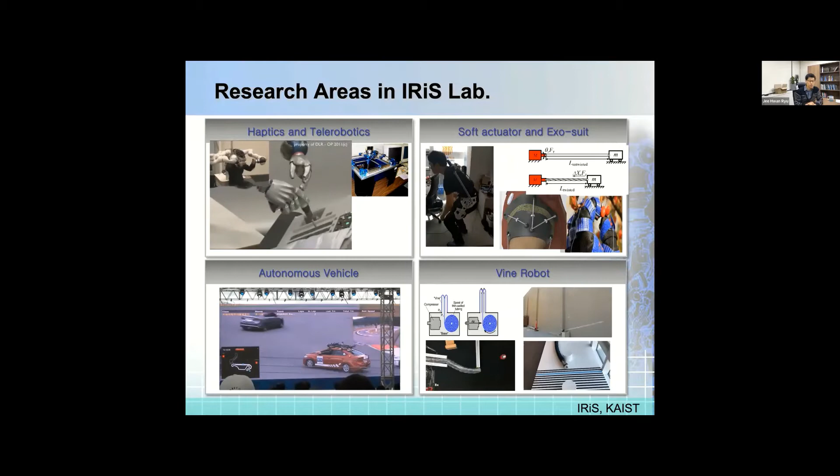So it's like we are doing 4 totally different research topics, but actually our theme is human and robot interactive systems. We are developing interactive robotic technology and interactive robotic control schemes for human-robot interaction. Then let's get back to the main topic.

I've been working on haptic interfaces and haptic systems for many years. What is a haptic interface? I guess all of you already know. A haptic interface is a mechatronic system that allows a human to feel and physically manipulate a virtual or remote environment. In a sense, a haptic interface is closely or physically interacting with a human, so safety is one of the critical factors. Safety is really important.

If you look at haptic interfaces, there are 2 different types: impedance type and admittance type. Not only haptic interfaces, but also all general robotic systems that physically interact with humans can be categorized into these 2 types.

What is impedance type? Impedance type usually measures position and provides a force command, and it's backdrivable and lightweight. So it's good for low impedance display, but limited in displaying high impedance. On the other hand, admittance type haptic interfaces measure force and provide a position command, so they are usually non-backdrivable and heavyweight. This makes them good for high impedance display, but quite limited for low impedance display.

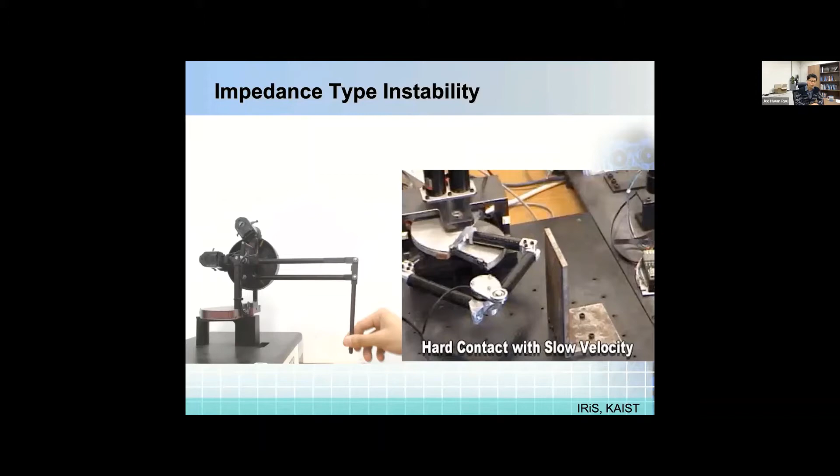That's the kind of unstable behavior and instability. For telerobotic systems as well, if you try to increase the virtual coupling between master and slave — suppose we're using a haptic interface as master and a remote robot as slave — then let's see.

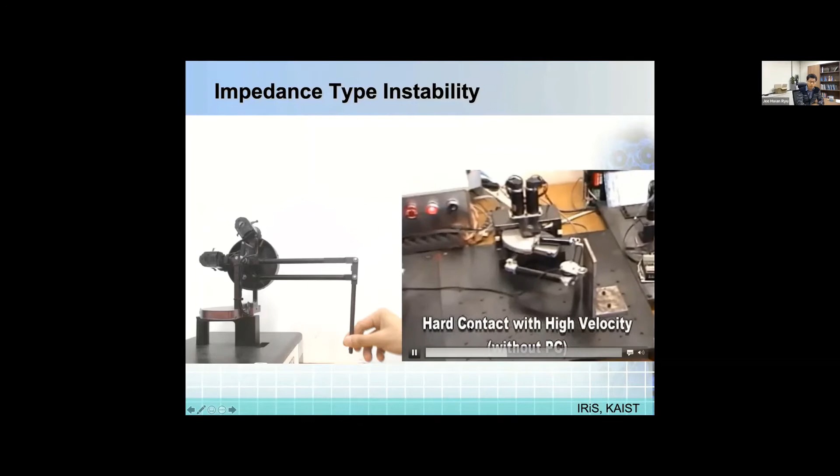Okay, that's enough. So that's a highly unstable behavior. Then how do we stabilize this unstable behavior?

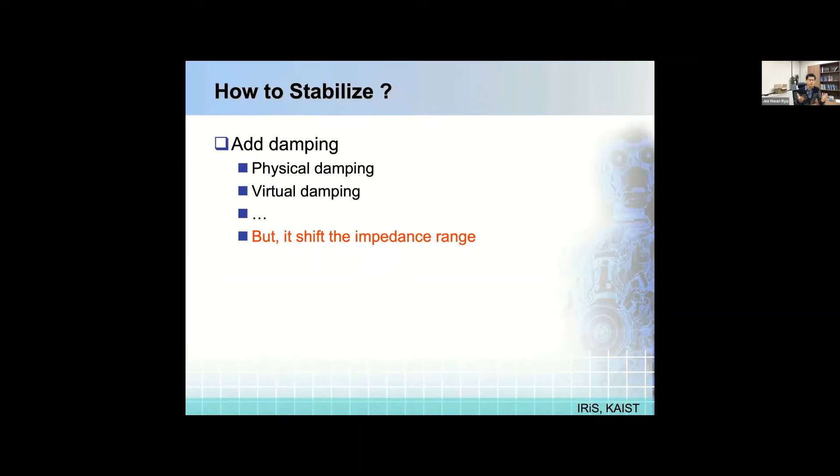Usually people try to add damping, either physical damping or virtual damping, but that actually shifts the impedance range, it doesn't increase it. Also you can limit or adjust the stiffness, basically lowering the controller gain with virtual coupling or energy bounding type methods. But this also compromises the impedance range. So basically we can stabilize the system, but we need to sacrifice and compromise performance.

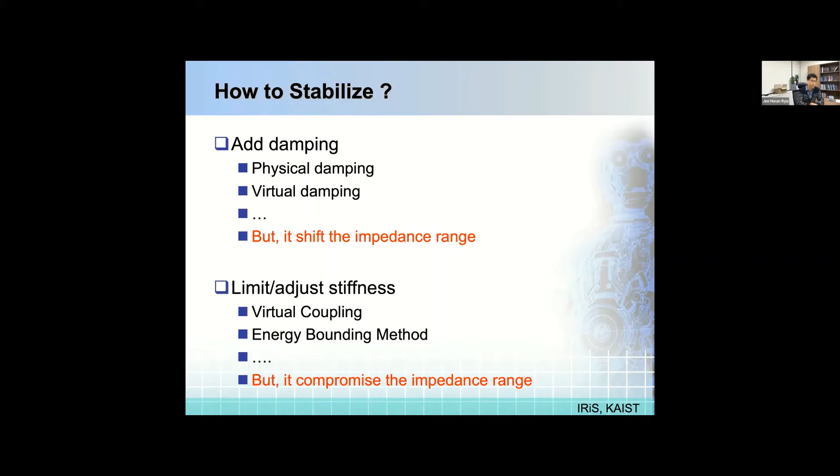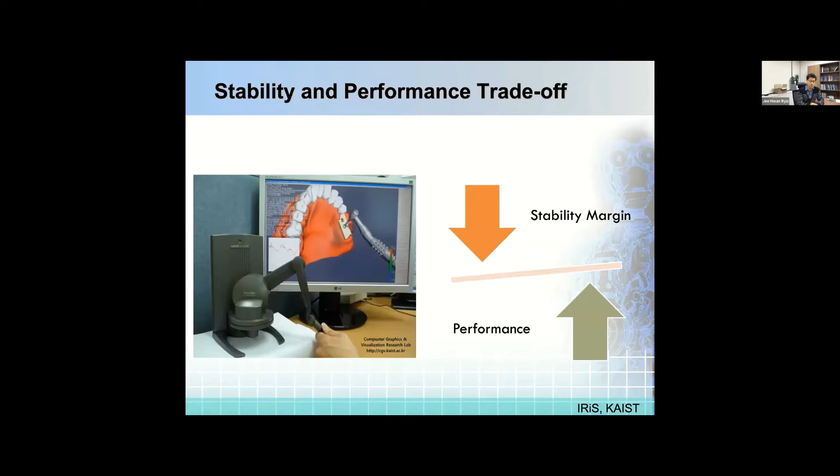So there's always a trade-off between stability and performance in any haptic or robotic manipulator control. If you want to increase the stability margin, you have to sacrifice performance, and if you want to increase performance, you have to sacrifice the stability margin, and vice versa.

About 20 years ago, I proposed the time domain passivity approach, one typical control approach. This control approach is known as one of the least conservative control approaches of its kind, because it minimally modifies the original optimized controller structure or controller gain. So it's known as one of the least conservative control approaches.

It has two components: a passivity observer, which can measure energy flow in real time, and a passivity controller, which is kind of an adaptive energy dissipation element, applied whenever necessary.

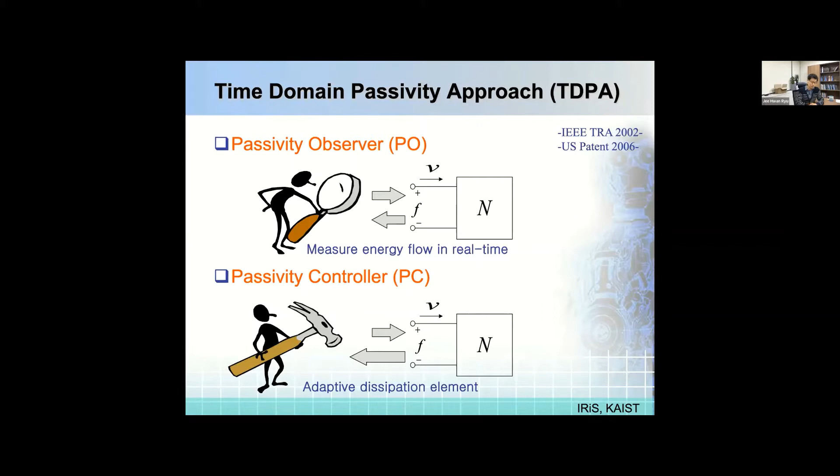Let's talk about what passivity is. Passivity is based on the conservation of energy. As you all know, energy supplied by a network can never exceed the energy which has been fed into it. So this is the mathematical definition of passivity.

Let's say there is a one-port network system, or some physical system, like this key, my car. If you push the system and the resulting velocity is in the same direction as the force, that means you're providing energy to the system. But if you push the system and the resulting velocity is opposite to your force direction, that means the system is giving back energy to you, energy comes out of the system.

So if you integrate this power conjugate pair, force and velocity, over all time, considering initial energy storage, and this value stays positive for all time, that means the system is passive. That's the mathematical definition and physical meaning of passivity.

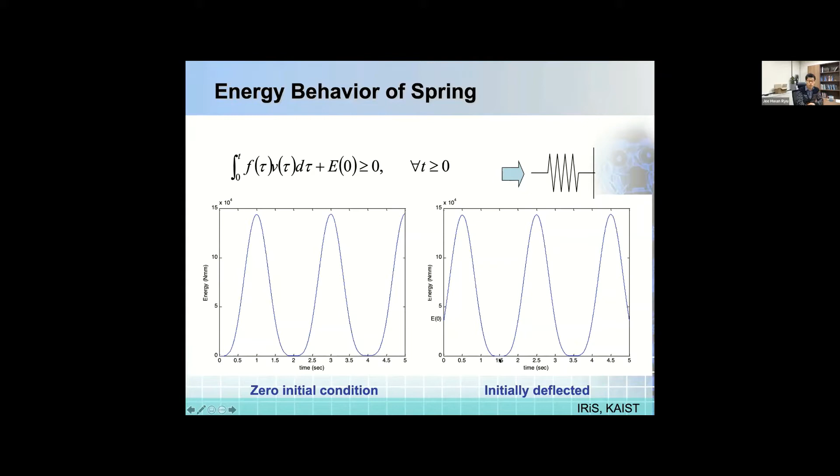Let's take a simple example with a spring. If you press the spring, you give energy to it and energy accumulates inside the spring. At some point you let it go, and the spring gives energy back to you, but never more than what you gave to it, so the spring is passive. But if the spring is initially deformed, then you start to press it, energy comes into the system from that point. At some point, if you let it go, energy comes out of the system, and it can be more than what you just gave in that instant, but the spring is still passive overall because the total energy never goes below zero. That's the mathematical and physical meaning of passivity.

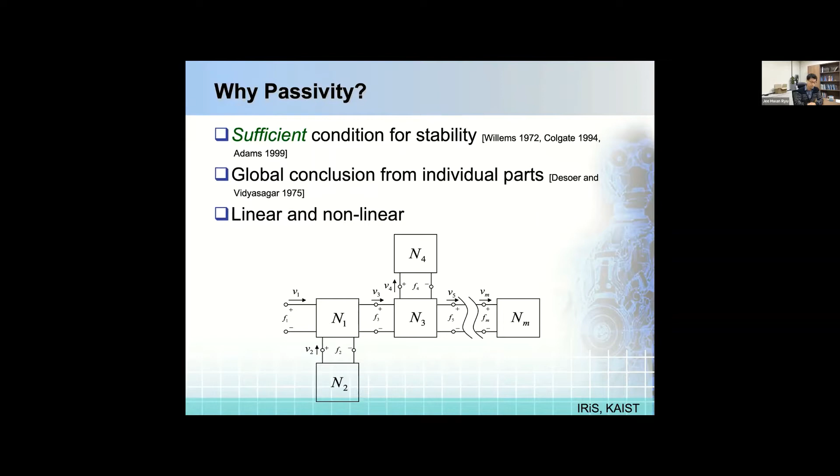So why do we care about passivity? Because passivity has a very fascinating property: it's a sufficient condition for stability. We don't need to prove stability directly anymore, and we can draw a global conclusion from individual parts. So if individual parts are passive, then the overall system is passive. This means you can individually passivate the system. We can also handle nonlinear systems simply by considering input and output signals. It's a very fascinating property. Passivity has many fascinating properties.

So we propose the passivity observer and passivity controller. The passivity observer is an energy monitoring component. As I mentioned, there's a mathematical definition of passivity, but it's quite challenging and difficult to satisfy this mathematical condition in real time because it's very simple but nonlinear. What other people did was convert this into the frequency domain, design a controller there, and convert it back to the time domain, which ends up having a fixed controller gain considering the worst case.

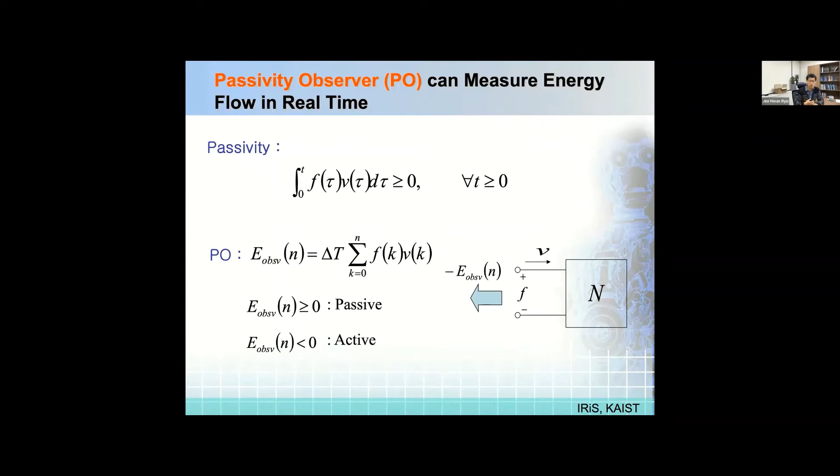But what I proposed is extremely simple, maybe too simple actually. What if we integrate this in real time based on the monitored signal? If this value stays positive all the time, then the system is passive, and we don't need to worry about passivity. But at some point, if this value goes below zero, the system is active. The good thing is, since we are monitoring this in real time, every sampling time, we know exactly how much energy is produced in real time from the system.

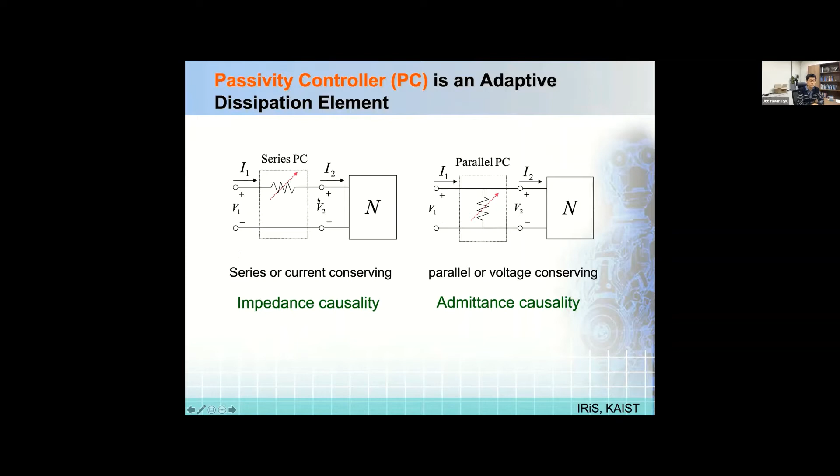Since we know how much energy is produced in real time, we can apply an adaptive damping or dissipation element, depending on causality. For impedance causality, we can use a series type passivity controller, and for admittance type causality, a parallel type passivity controller, which basically means modifying force based on velocity, or modifying velocity based on force.

And the beauty of the passivity controller is that it can very easily be implemented into existing control architecture. By adding several lines of C code, you can implement a passivity controller. This is the main core part of it, only 3 or 4 lines of C code is enough.

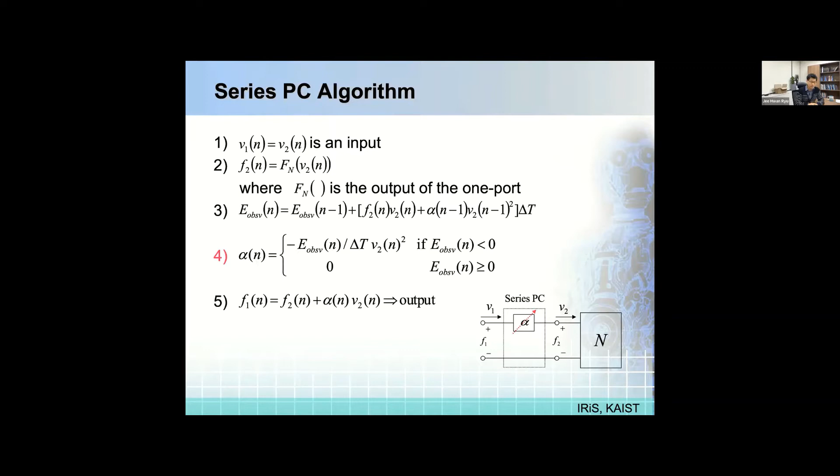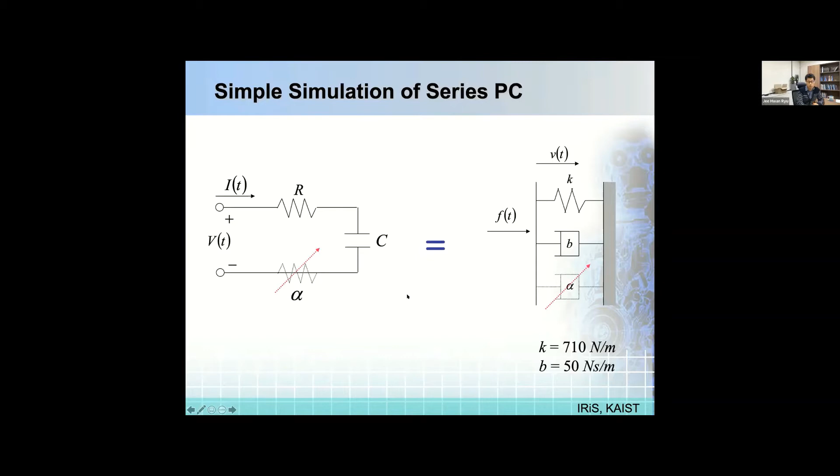Let's take a simple example with a virtual wall with spring and damper. There is a virtual spring and damper in parallel with the virtual wall, which is equivalent to a resistor-capacitor serially connected electric circuit. The physical meaning of the passivity controller is an adaptive resistor or adaptive damper, which appears and adaptively changes whenever necessary.

So I push and release with this velocity profile of the virtual wall. Much energy first comes into the virtual wall, and a little less amount of energy comes out of it. That difference is actually dissipated by the damping of the virtual wall.

But when I intentionally change the virtual damping to a negative value, which is not physically feasible, but I just want to make the system intentionally active, then a bigger amount of energy comes out of the system than I gave. So it's basically active, become active.

And I turn on the passivity controller to dissipate this. When this energy is about to cross the zero line, the passivity controller adaptively dissipates all the produced energy in real time. So if you look from outside the system, it just looks passive.

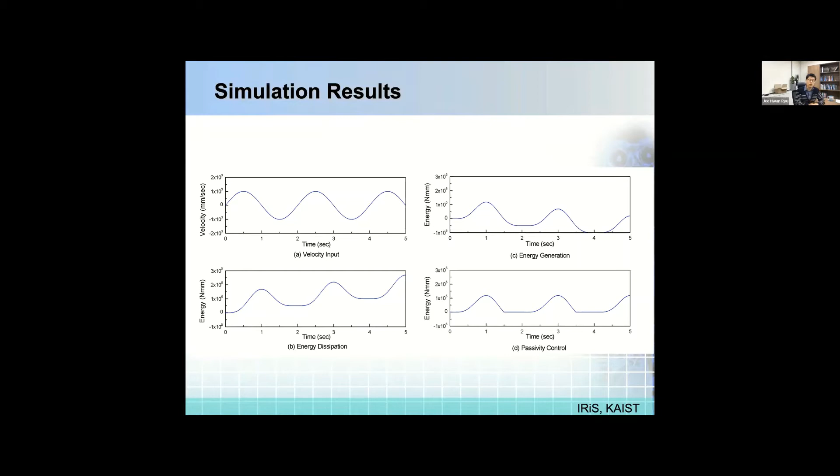That's very simple. The passivity controller was first implemented on the Excalibur haptics interface at University of Washington when I was a postdoc there. This haptic interface can display 200 Newton force maximum on each axis, and it is interacting with a virtual Lego airplane.

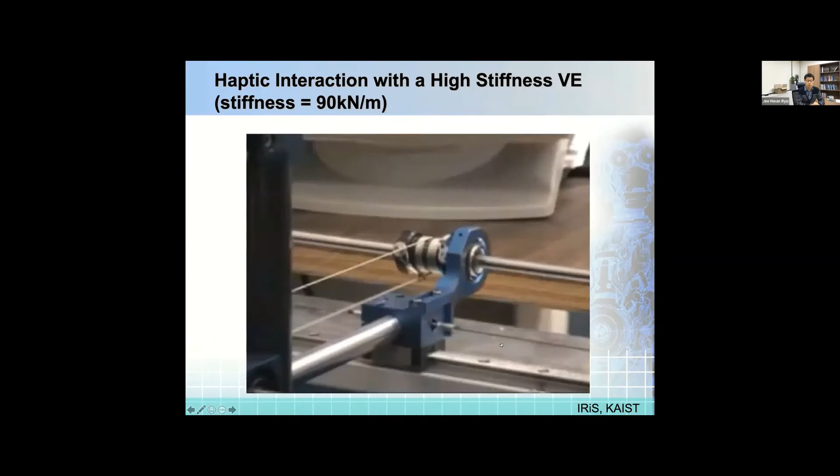The issue was, what was the maximum allowable stiffness that we could display? One of the former PhD students there, Rick Adams, proposed the virtual coupling idea to stabilize haptic interaction. The maximum stiffness that virtual coupling could stabilize was 70 kilonewtons per meter. But I increased this value to 90 kilonewtons per meter, which is very high, extremely high.

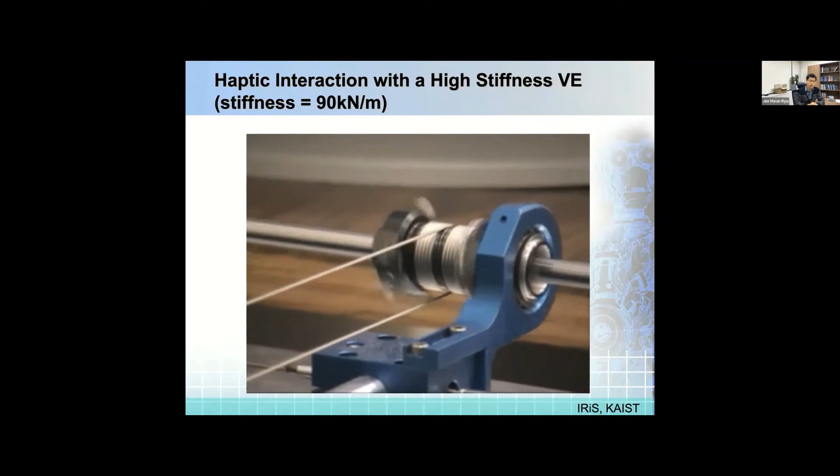As you can see, this contact was quite unstable. But after I turned on and implemented the passivity controller, we were able to achieve stable interaction and stable contact while maintaining the same high virtual stiffness, 90 kilonewtons per meter. That was the first implementation.

And I extended this idea to the multi-port case, in order to implement a similar idea for telerobotic systems and other control systems. The issue was, for the single-port case it was straightforward, but for the multi-port case, where to put the passivity controller, how to monitor energy, what type of passivity controller to use, how to activate this - those are all questions. I won't explain this in detail, but you can see the paper.

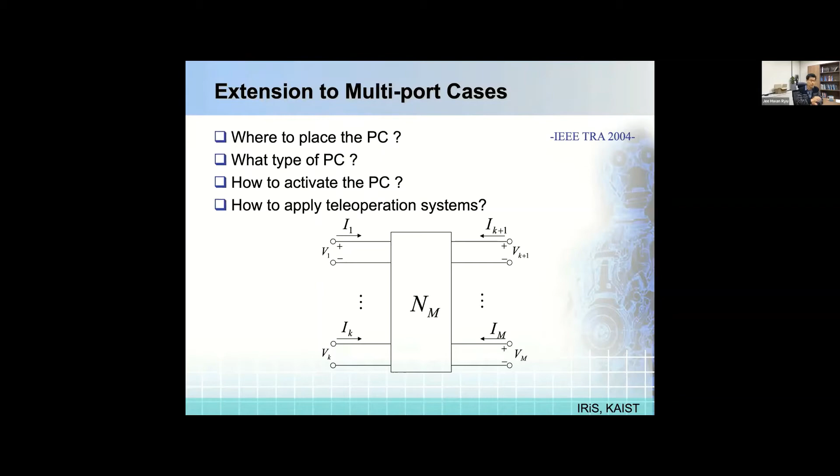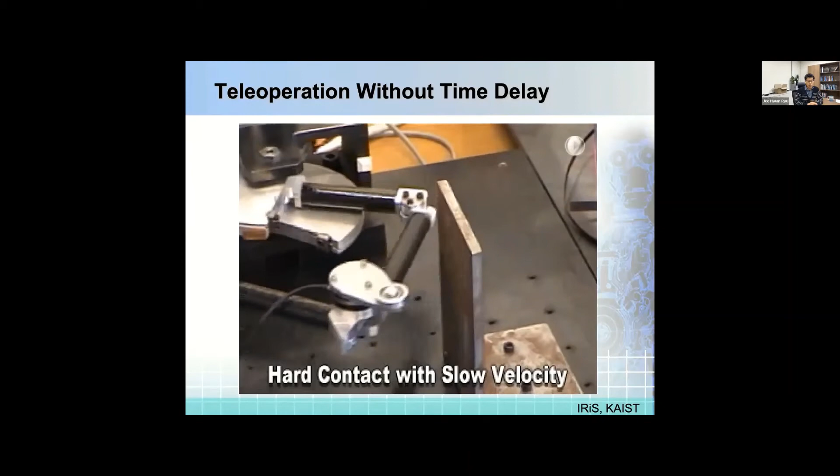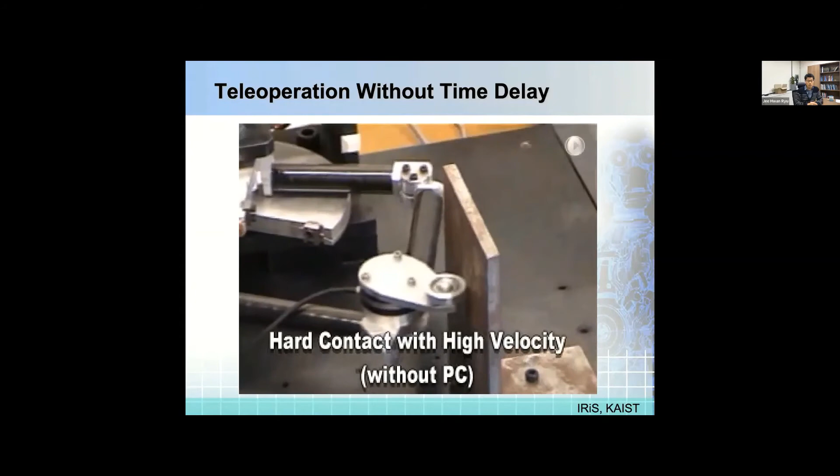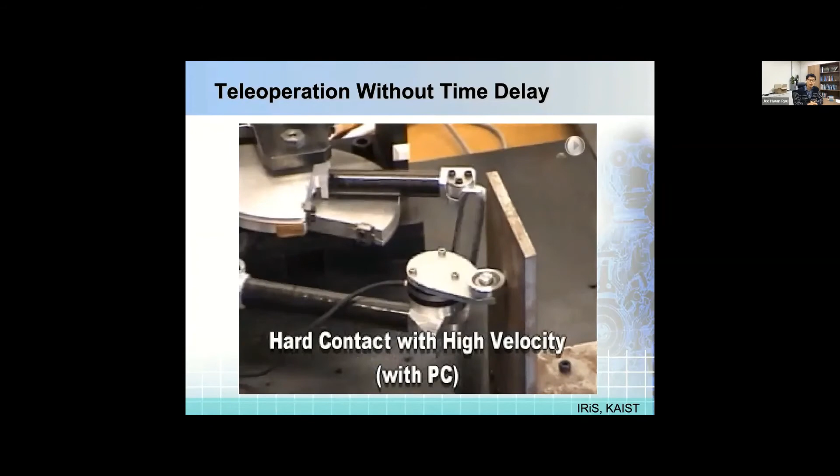I developed a master-slave telerobotic system, two-DOF with a force and torque sensor at the tip. As you can see, if I approach at slow velocity, there was no stability issue. But if I made contact with normal or high enough velocity, the system suddenly goes unstable. With the passivity controller, we were able to make stable contact and stable interaction.

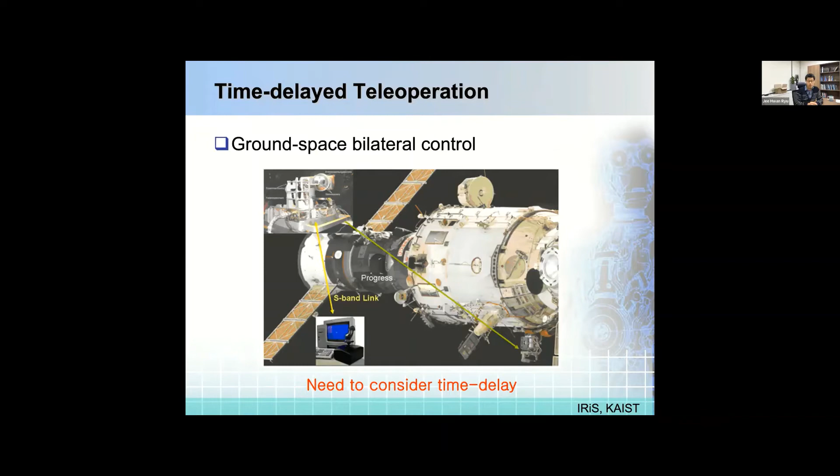After that, I was invited to the German Aerospace Research Center, DLR, because they wanted to implement this control algorithm in their ground-space bilateral teleoperation system. In order to implement this idea, we needed to consider time delay - that was a critical issue.

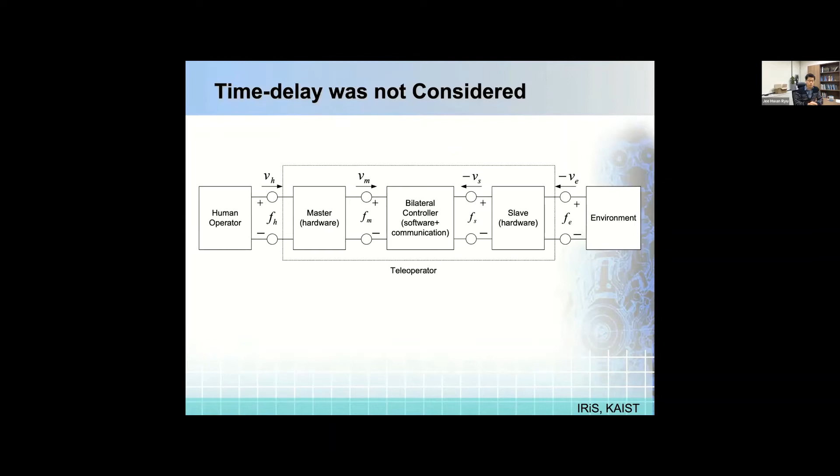If you look at the control architecture of the telerobotic system I implemented in the previous video clip, this is a teleoperator and telerobotic system. If I magnify the teleoperator part only, there is a master, a slave, and a bilateral controller. What I did was extremely simple.

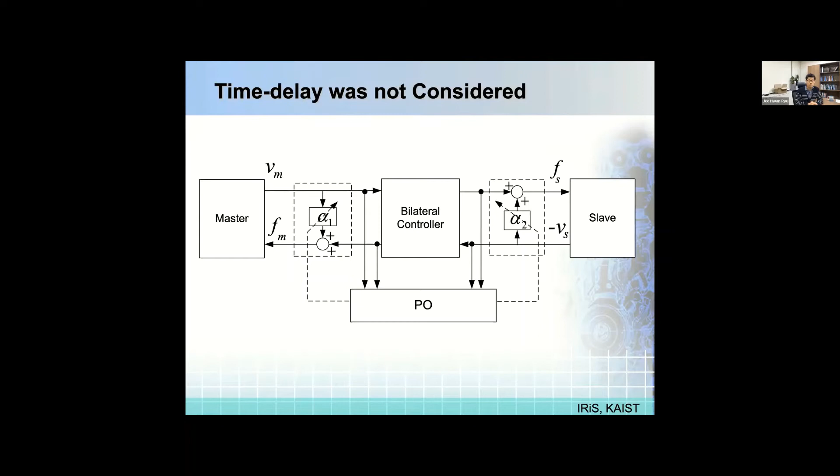I just took the power conjugate pair from both sides of the bilateral controller, integrated this, and estimated energy. Whenever there is output energy, which possibly makes the system active and unstable, I put adaptive damping to dissipate this in real time. That's basically the architecture.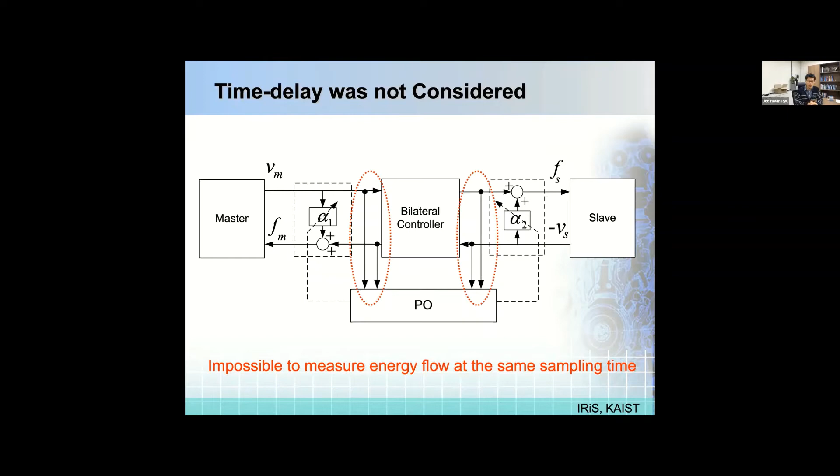But when there is time delay, it was impossible to measure energy flow at the same sampling time because there was time delay between master and slave. So it was very difficult. Together with DLR researcher Jordi Artigas, we extended the time domain passivity idea considering time delay.

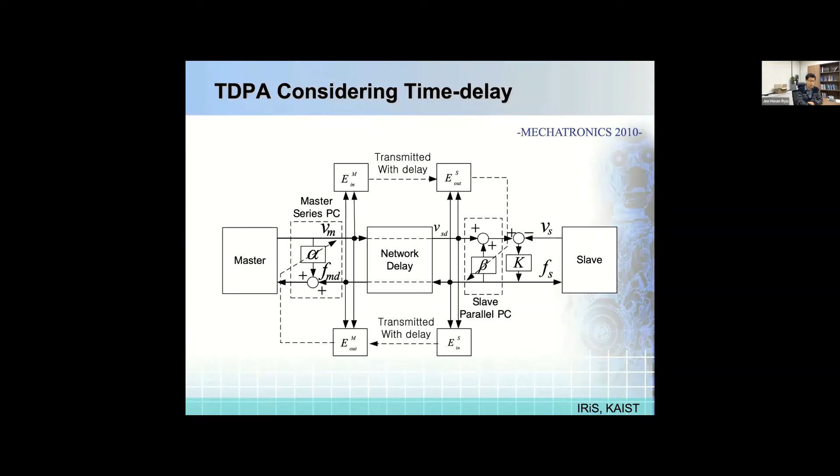The idea is also very simple. By looking at the power conjugate pair, we can separate input and output energy. By monitoring input energy on one side and output energy on the other side, and sending the input energy value to the output side, we compare output energy and input energy. When the output energy is about to be greater than the input energy, we put adaptive damping and dissipate this. That's the basic idea.

That idea has been implemented in phantom teleoperation in our lab. This is not my voluntary motion - I was not able to actually make stable contact. It became crazy, even with just 100 millisecond time delay.

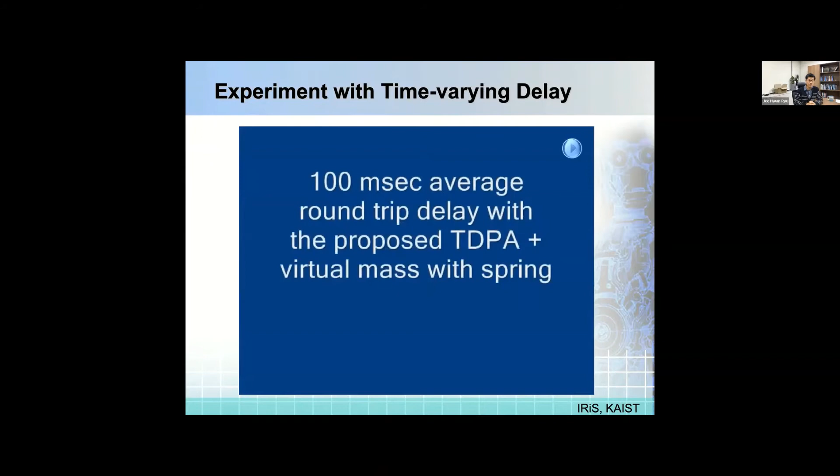But after TDPA was implemented, as you can see, the contact was stable, and I was able to manage stable contact, and get big enough force feedback from the slave side. And the magnitude of time delay was actually not a problem. So based on this control architecture, we were able to manage over 2 seconds of even communication blackout.

Okay, since the video clip is quite long, I will skip this.

And why is this approach better than other control approaches? There is another control approach, like wave variable control, to overcome communication time delay. But when we compared time domain passivity control architecture with wave variable control architecture, the time domain passivity control architecture minimally modifies the original force measured from the slave side. If you compare this to wave variable, the wave variable approach may smooth out the original control force a lot.

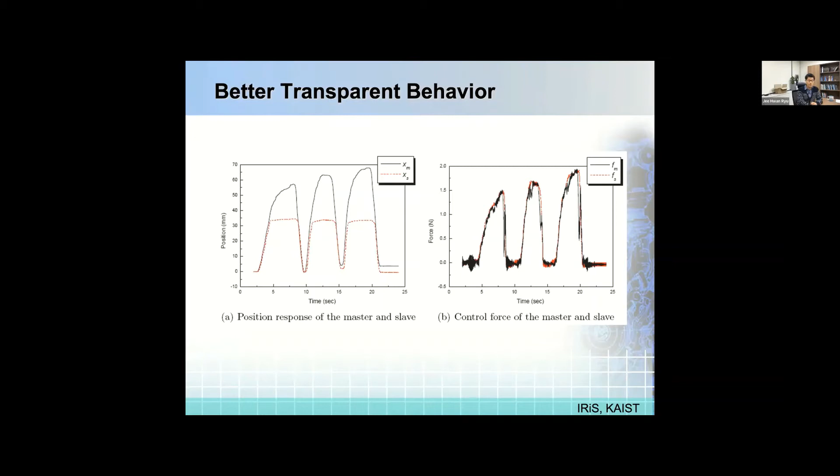Okay, so in that sense, TDPA shows better transparency. And I transferred this control idea to DLR, and they implemented this idea in their Space Justin telerobotic system, as you can see here.

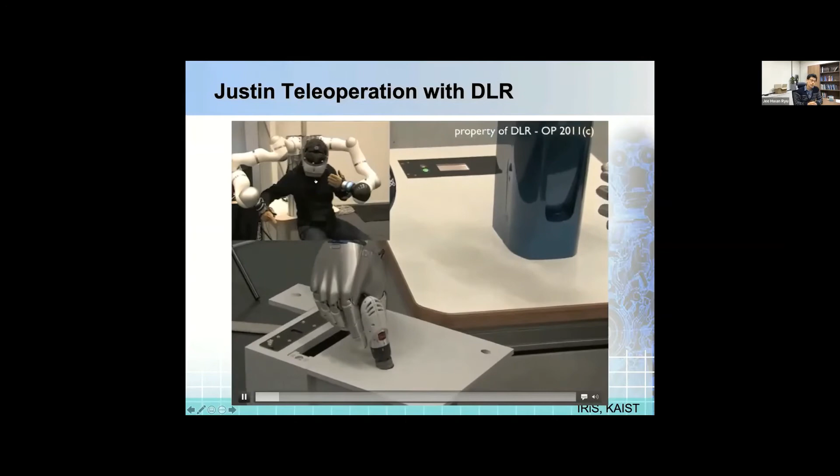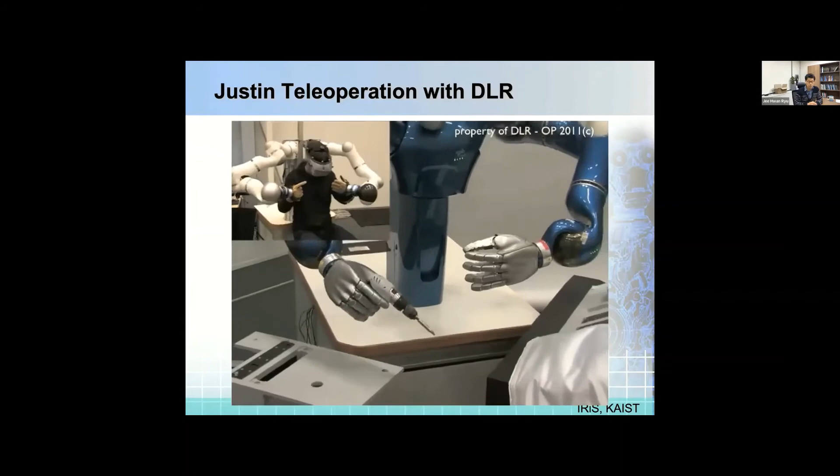So the guy controlling this is Jordi Artigas, who is my collaborator. By implementing and extending this idea to a multi-degree-of-freedom redundant manipulator, he was able to see what robots see, and he was able to feel what robots feel. So he can basically do most of the tasks that an astronaut in the International Space Station needs to do.

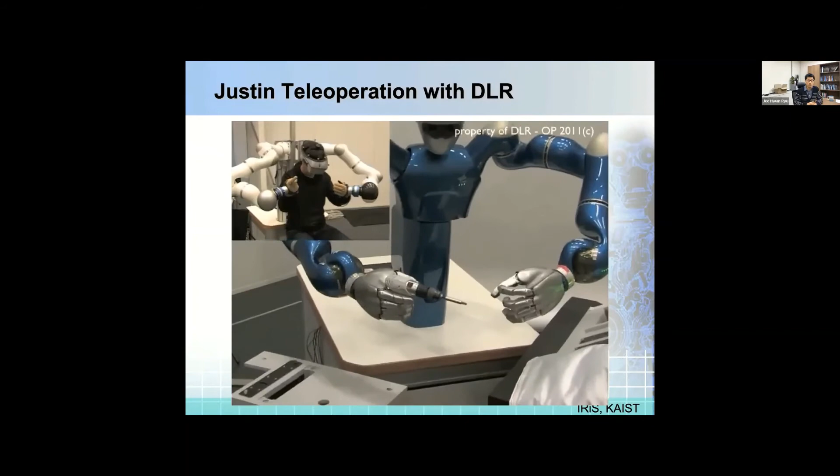This robot system actually communicates through satellite, and there is a 500 millisecond time delay. I will skip this also, fast. So you can do drilling jobs, switch operations, and so on and so forth.

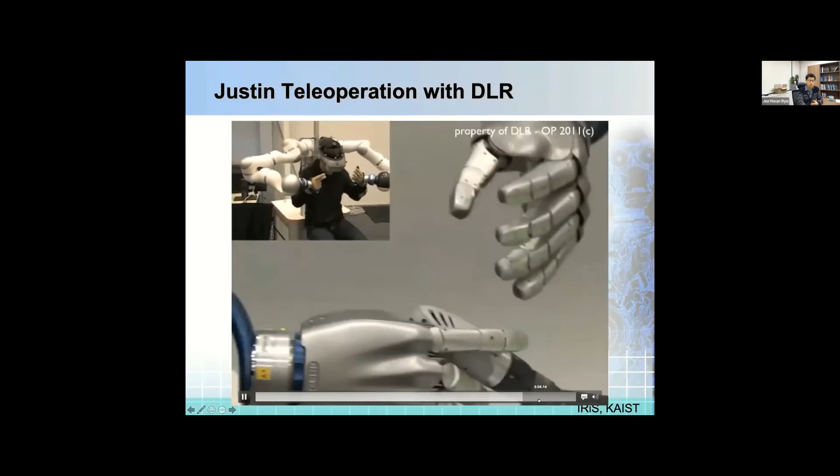And recently, we actually did the opposite teleoperation. So an astronaut in the International Space Station controlled the Justin robot on the ground to demonstrate handshaking. In one exhibition, they demonstrated handshaking performance with one of the politicians in Germany. And we got great feedback from the astronaut. He said the feeling was great and quite transparent.

Not only for haptic and telerobotic systems, we extended this idea to explicit force control. There are two types of force control methods in general: indirect force control, which does not use a force sensor, and direct force control, which uses a force sensor. In direct force control, there are also two types: with inner loop position control and without inner loop position control.

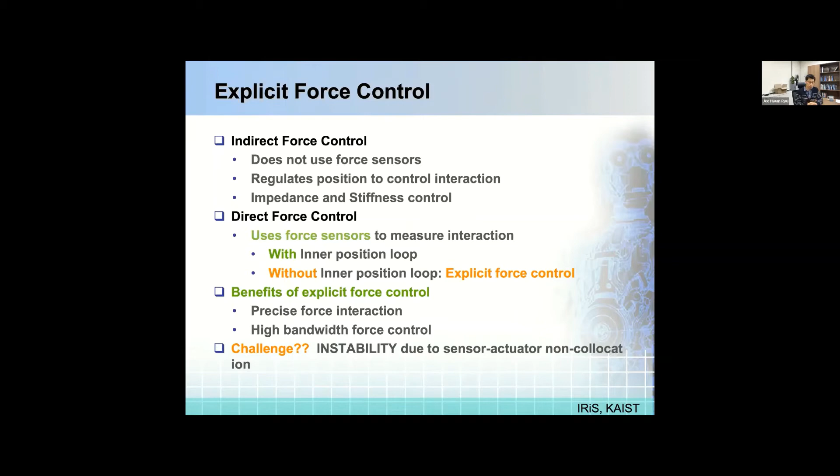We call direct force control without inner loop position control explicit force control. The benefit of explicit force control is that it provides precise force interaction and high bandwidth force control. So it's quite an interesting control architecture, but quite challenging to stabilize due to the sensor and actuator non-collocation problem. Together with researcher students at Stanford and DLR, we extended this TDPA, time domain passivity control idea, to explicit force control of the KUKA robot.

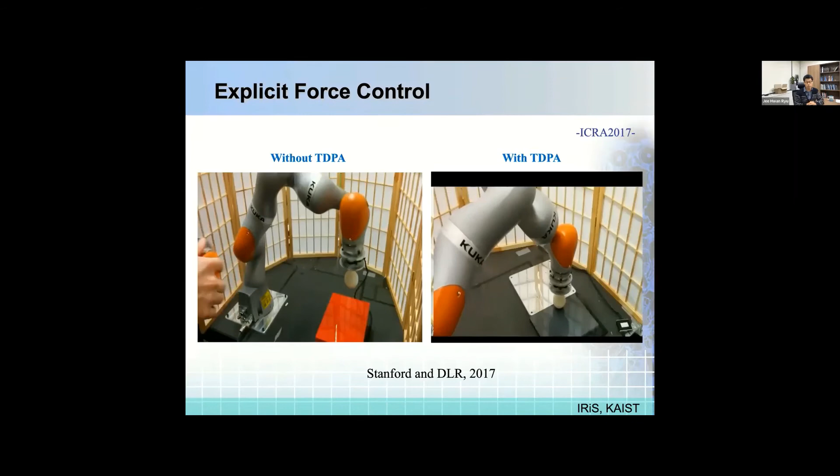As you can see on the left, without TDPA, with a simple disturbance, it easily goes unstable. And when the surface stiffness suddenly changes, the robot cannot maintain explicit force control. With TDPA, we were able to manage stable force control, and even sudden surface stiffness changes don't destabilize the system.

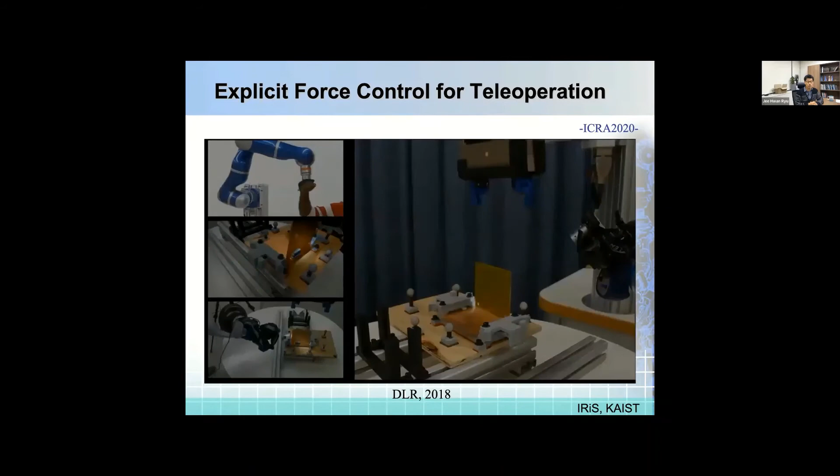We also extended this idea to teleoperation, including explicit force control architecture. Due to the high precision force control and high precision position control performance, we were able to conduct a chip insertion task with communication time delay through teleoperation, even with sub-millimeter tolerance. That shows quite a possibility and feasibility of teleoperation for dexterous manipulation.

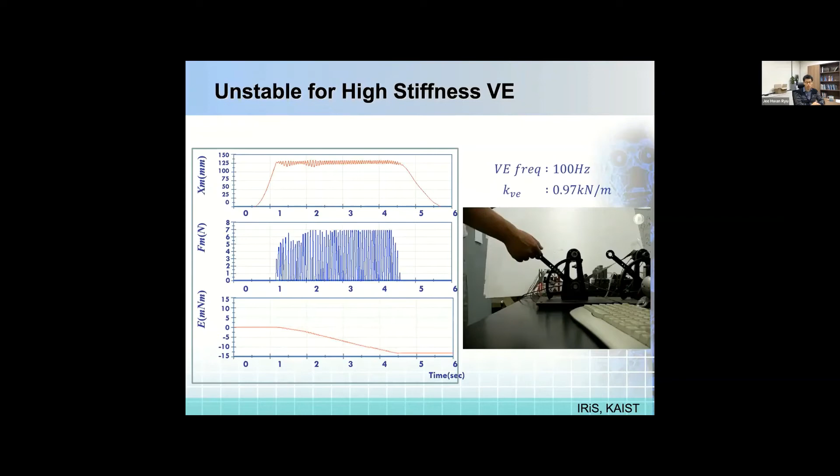All right, so time domain passivity control approach shows good performance in haptic teleoperation and even explicit force control, but there is certainly a limitation. With such a lightweight, small haptic device, 100 Hertz low sampling rate, and 1 kilonewton per meter is already high enough to destabilize the interaction.

Time domain passivity approach can stabilize this up to twice as stiff, but as you can see, there is some red line, noise-like behavior. Due to the on-off nature of the time domain passivity control approach, if we increase the stiffness to a certain level, then time domain passivity cannot stabilize this anymore.

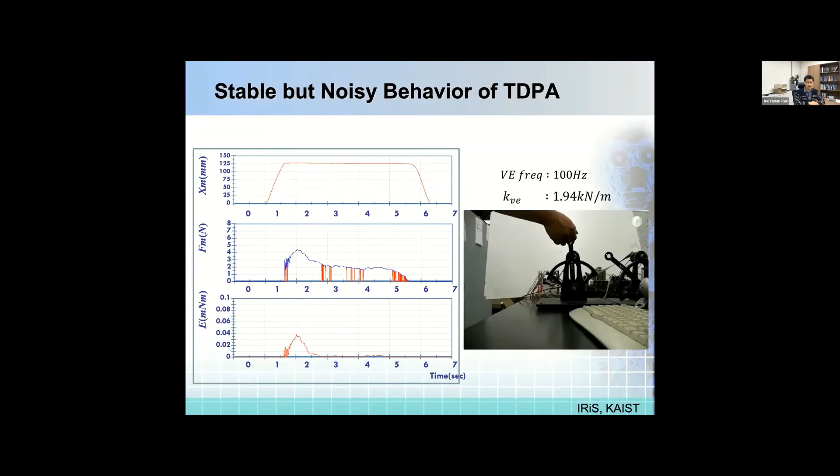So we started to analyze what the main, real reason for the unstable behavior is. Let's say this is the virtual environment, and this is the haptic interaction point. So you press in.

If you look at the position-force graph, this is the input pressing path, and the area below this pressing path is the input energy you give to the system. When you release, it follows the blue staircase line, and the area below this releasing path is the output energy from the system. So whatever small P gain you use, there is always bigger output energy than input energy. So the system is always active.

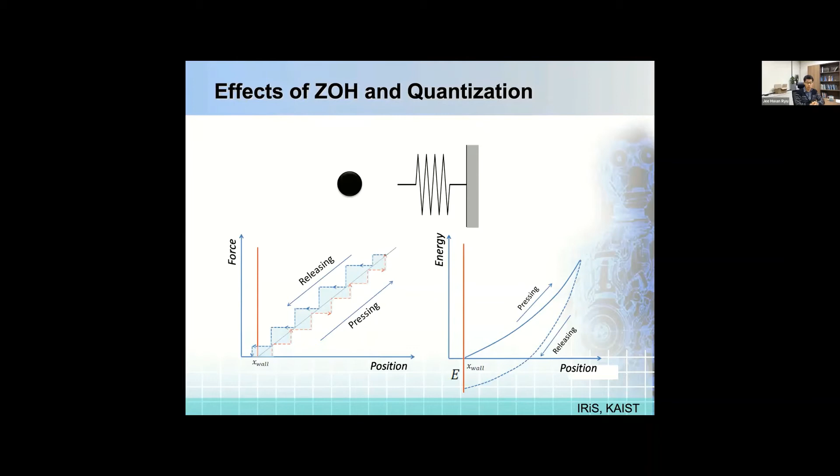Then how come the system doesn't diverge? Because passivity is simply a sufficient condition, so that much amount of energy produced from the system can be dissipated by the intrinsic system damping. Then the system is still stable. But if you increase the stiffness and controller gain, the amount of energy increases, so the system cannot handle this anymore, and it goes unstable. What we proposed is really simple.

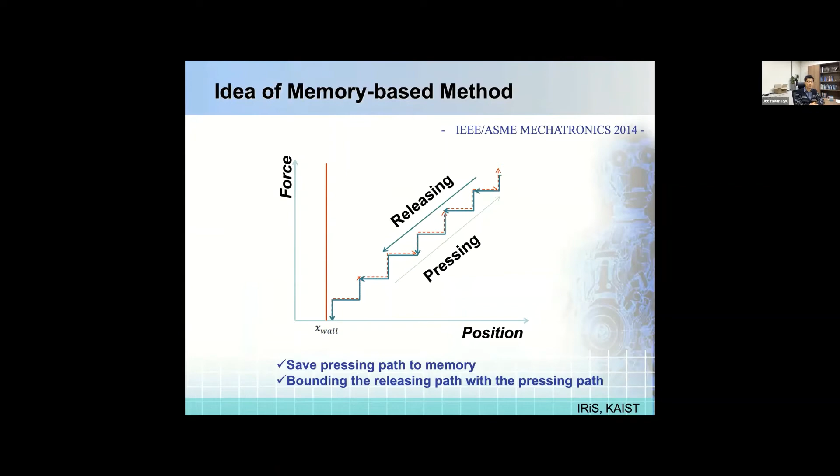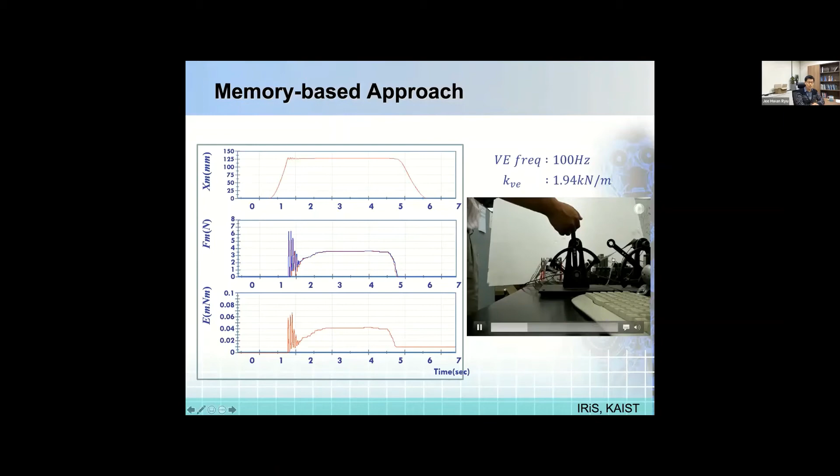We save the pressing path to memory, and when we release, we bound the releasing path with the pressing path. That way, we can make the system exactly passive, no more active energy output. By applying this, we were able to stabilize the interaction, and you can see there is almost no noise behavior, very smooth.

You may wonder how to extend this idea to the multi-DOF case, but we have done this. So without the memory-based approach, it's unstable. With the memory-based approach, it was quite stable, and we were able to feel high stiffness interaction.

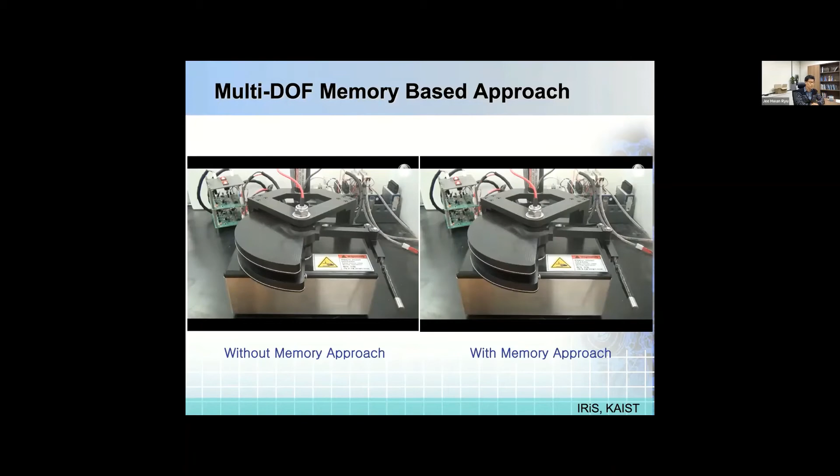But if we want to implement the memory-based approach, we need special hardware, which is not actually special nowadays. We need an FPGA as a motor driver. But there are many people who don't want to modify their hardware, but still want to increase their stiffness. So for them, we propose another control architecture, the successive force augment approach.

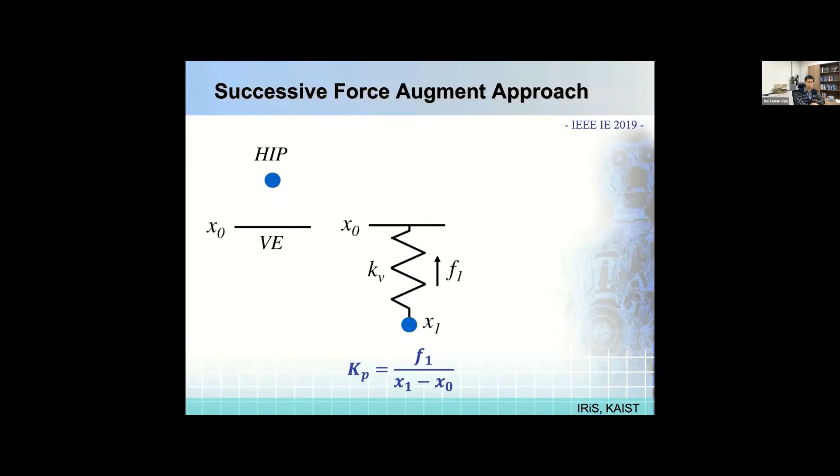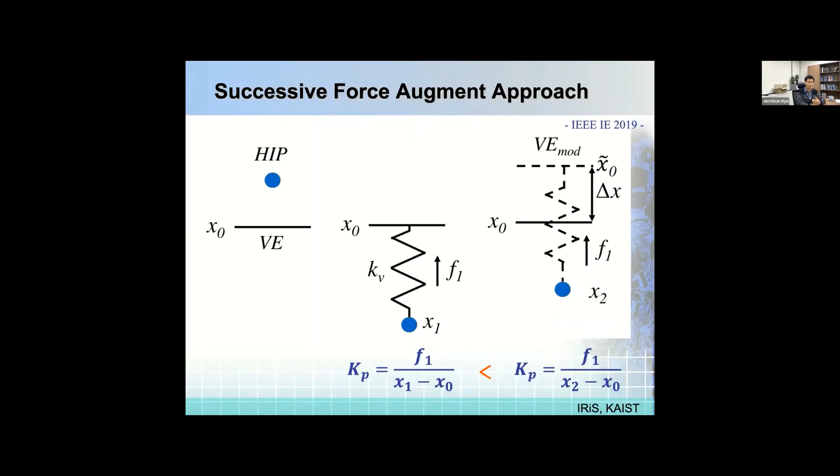Let's say there's a haptic interaction point and a virtual environment here. If you penetrate in, this is the perceived stiffness that you feel, force divided by penetration depth. But while the haptic interaction point is inside the virtual wall, you suddenly shift up the initial virtual wall position. Then the perceived stiffness suddenly increases, greater than the original stiffness. This looks like a trick, but it actually works when you implement this to haptic interaction, which is basically the same as introducing a state-independent feed-forward force.

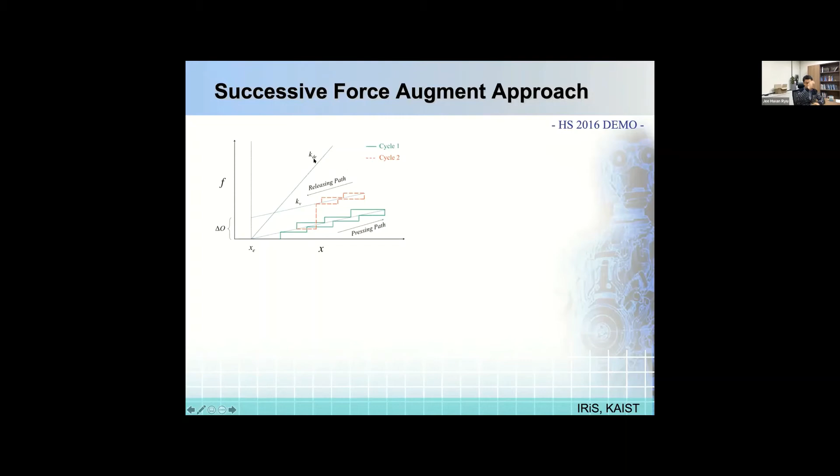So one penetration in and out introduces a force offset, and you jump to the next higher level stiffness, and in and out, jump to next, in and out, jump to next, and eventually you reach the higher stiffness, high force value. That idea has been implemented to the Phantom, and we were able to achieve 5 to 7 kilonewtons per meter for wall stiffness, which is extremely high for Phantom.

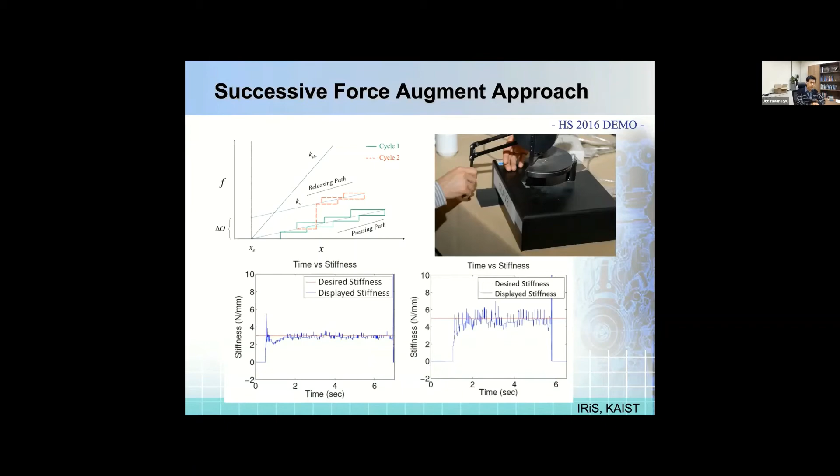There is another idea, similar but a little different. For the pressing path, we took low stiffness, low enough to stabilize, and the releasing path is even lower than this. So it ends up still inside the virtual wall, in the middle of somewhere. It just looks like introducing an offset. After that, we took another pressing path and releasing path, pressing path, releasing path, and eventually you reach the desired force and stiffness profile while maintaining low stiffness, while maintaining stable interaction. So that's kind of a trick, but it actually works quite well.

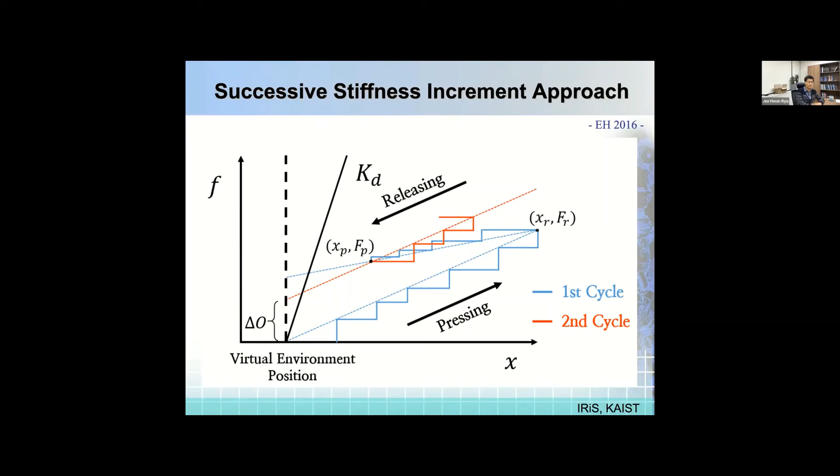We have implemented this idea not only in the haptic interface but also in series elastic actuator control. The series elastic actuator is actually good for stable interaction, but due to the non-collocated nature of the sensor and actuator, it's quite challenging to increase the controller gain. If you use low controller gain, it's stable but has slow performance, slow response. When you increase the controller gain, it easily goes unstable like this.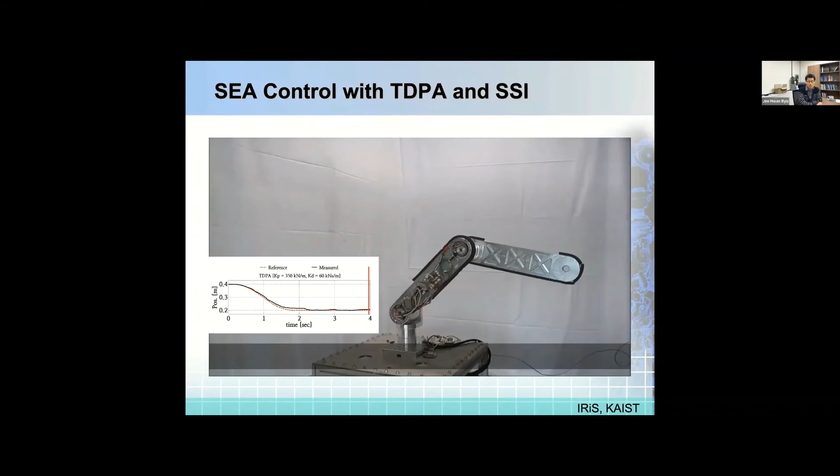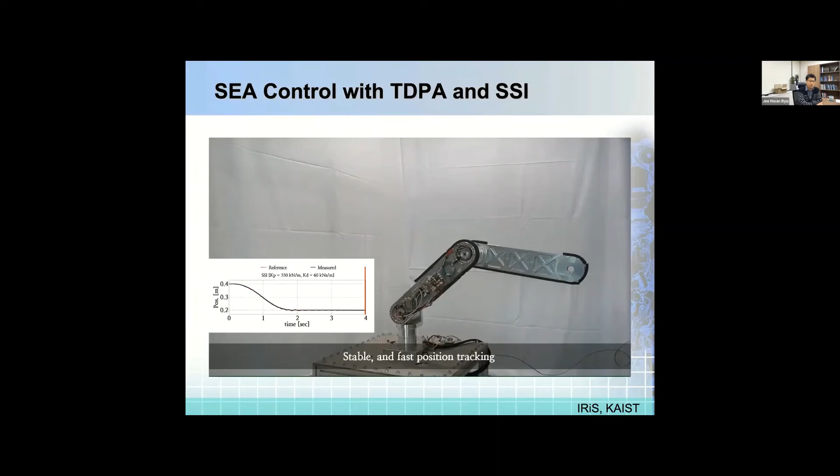You may think that putting in a damping gain can stabilize this, but not really — the damping gain cannot stabilize this one, it even becomes more unstable. So we implemented the time domain passivity approach for this, and we can stabilize it, but the response becomes quite slow because TDPA sacrifices a lot of energy, having to kill a lot of active energy. With the SSI, successive stiffness increment approach, we were able to make it move fast and also stable, which shows good performance. With a twice faster reference trajectory, the impedance controller goes crazy, but SSI and TDPA remain stable and still move with quite good performance, as you can see.

And what happens if you drop down on our object, so give it some impact?

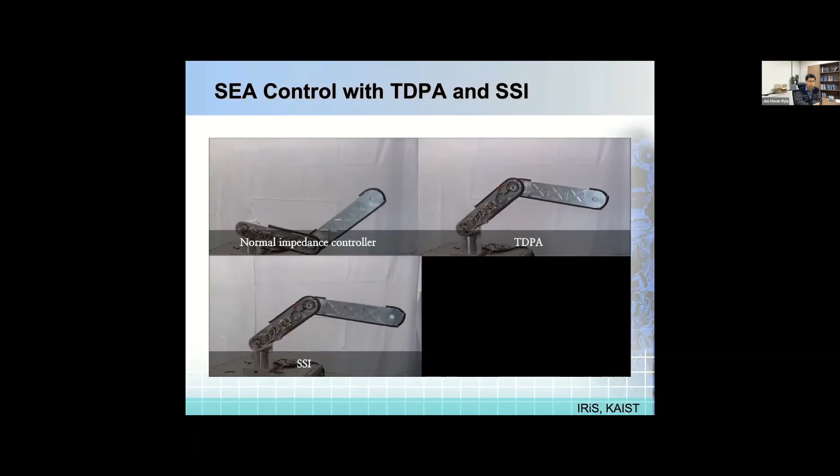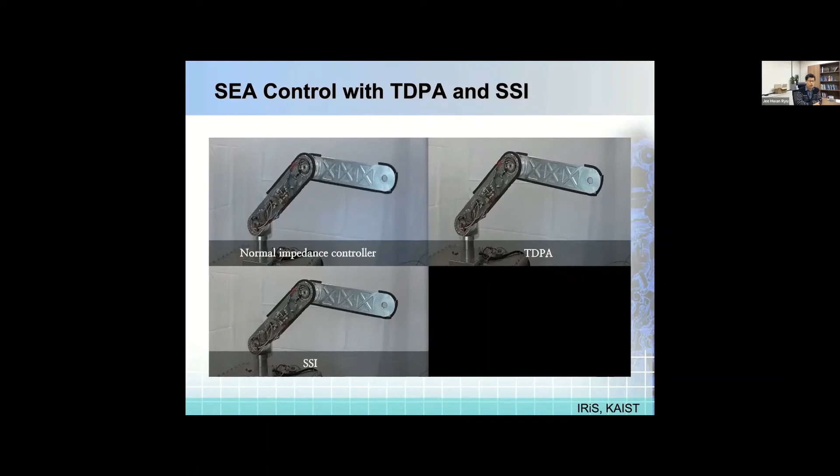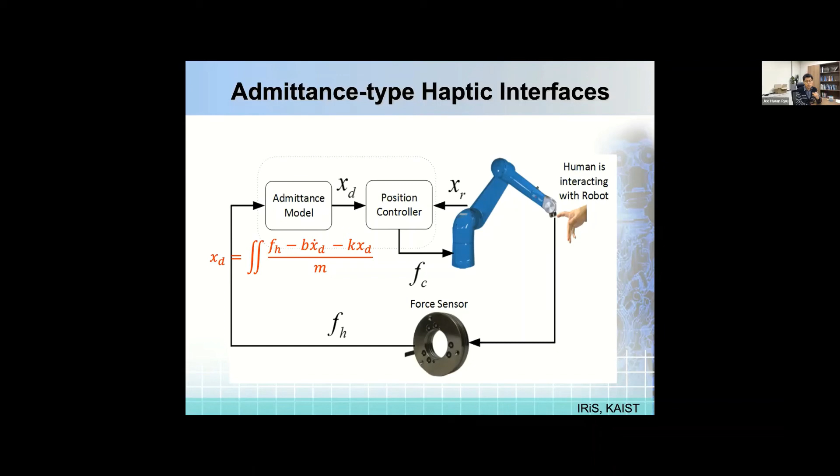This is the typical admittance model. As you can see, you cannot actually lower the mass below a certain value, because if you lower the mass and inertia, the sensor noise is magnified, which influences the position controller and desired position and velocity. So there is a certain limitation to lowering mass, just like there is a limitation to increasing stiffness in impedance type.

For this simple admittance type haptic interface, at 0.1 kilogram we can render it in a stable manner, but the operator feels very heavy and sluggish. If you lower the inertia to 0.01, it feels lighter, but the system already becomes unstable. Look at this oscillation.

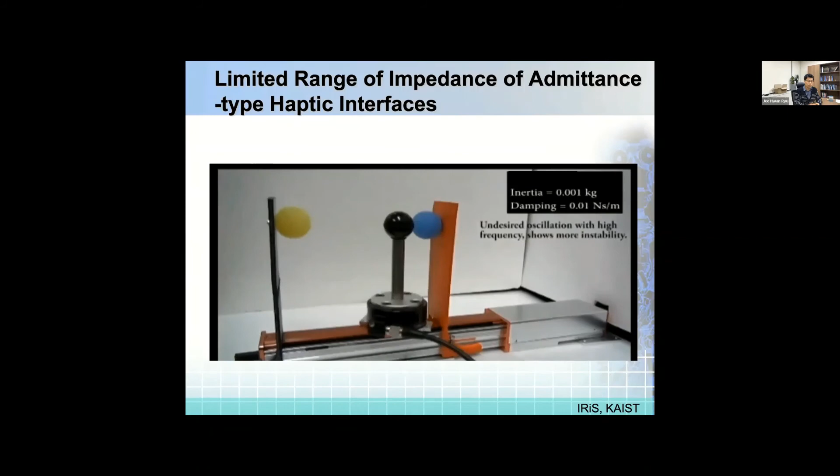Lowering one more digit to 0.001, the system becomes even more unstable, like this. You may think you can stabilize this by strongly grasping, but no, it's the opposite. If you increase your arm stiffness, the admittance type becomes even more unstable.

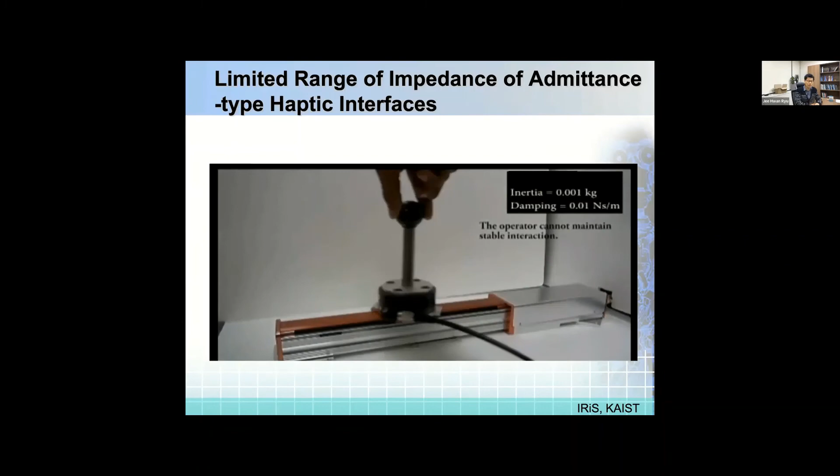So we extended the time domain passivity control idea for admittance type haptic interfaces. At 0.01, which was unstable in the previous case, we were able to stabilize the interaction.

And even one digit lower, at 0.001, now it feels very light and stable, like this.

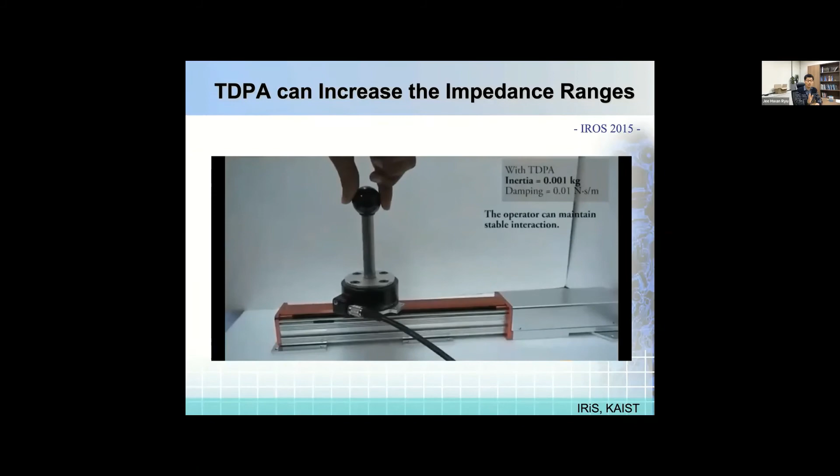By grasping strongly, even though human arm stiffness increased, the operator can still maintain stable interaction. This seems good enough, but we want to lower this value even further and have a less conservative controller.

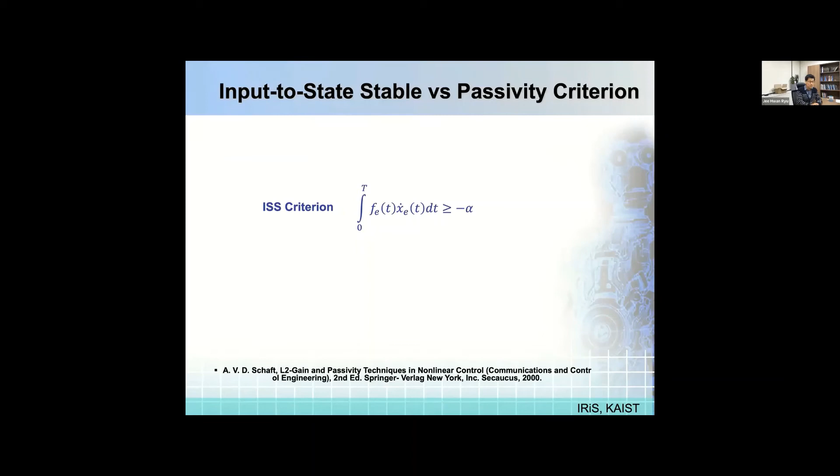So one of my former PhD students proposed another control criteria and architecture: the input-to-state stability approach. The passivity criteria actually bounds the produced energy by the initial energy storage, like this. The maximum energy output is bounded by the initial energy storage.

But ISS, input-to-state stability criteria, bounds a simple random constant value instead. As long as you can find a random constant value bounding the produced energy, the system is ISS stable. This means the control approach can produce more energy, which means it is less conservative.

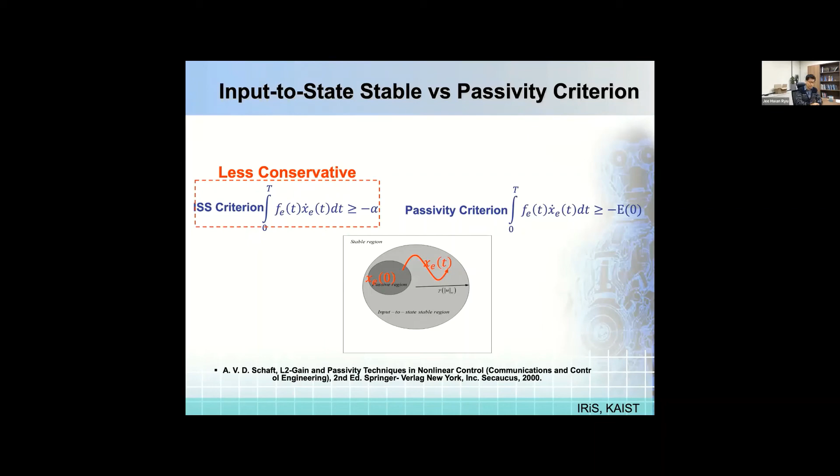We extended this idea and implemented it on the same admittance type haptic interface. You can see it's one more digit down, 0.0001, so 0.1 gram, extremely light with even smaller damping. It feels very light, and strong grasping doesn't influence stability.

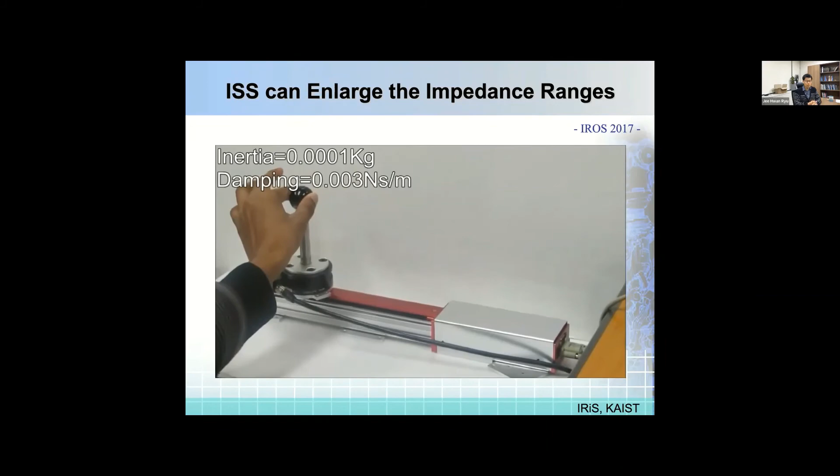So we got very good performance with the ISS approach. If we compare the range of damping and inertia that admittance type can cover, the ISS approach can cover a larger area than TDPA. The upper region is the range that each control approach can render in a stable manner.

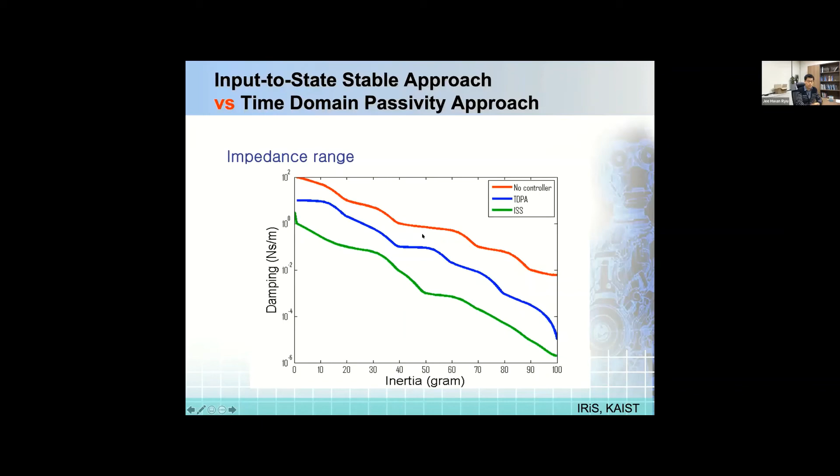In summary, I have introduced several stable interaction methods: time domain passivity, memory-based passivity, successive force augmentation, successive stiffness increment, and input-to-state stability, among other control approaches. I hope you now have a brief idea about each control approach, and depending on your application, you can selectively use these approaches for your own system.

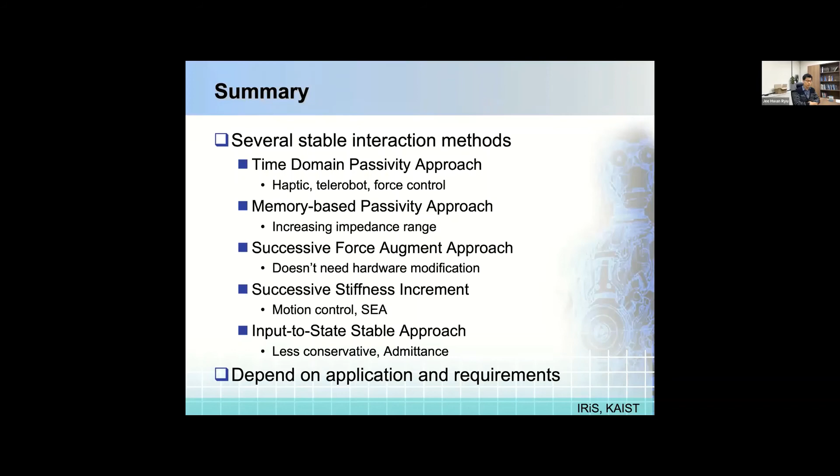Thank you very much, Professor Ryu, for your wonderful talk. We had some questions from chat. Meanwhile, while we are preparing, I wanted you to elaborate for the general audience. You've talked about many research applications about increasing stiffness, for example, for haptic interfaces. Can you give us any examples of exciting applications of haptics in teleoperation?

Maybe the most interesting applications for you in real life industry or any other applications of this technology apart from research?

Okay, so I believe haptic and telerobotic system has long history, more than 60 years, and one typical application of haptic and telerobotic system is sending a robot to a hazardous environment instead of human, like underwater exploration, nuclear plant, and nuclear toxic waste handling.